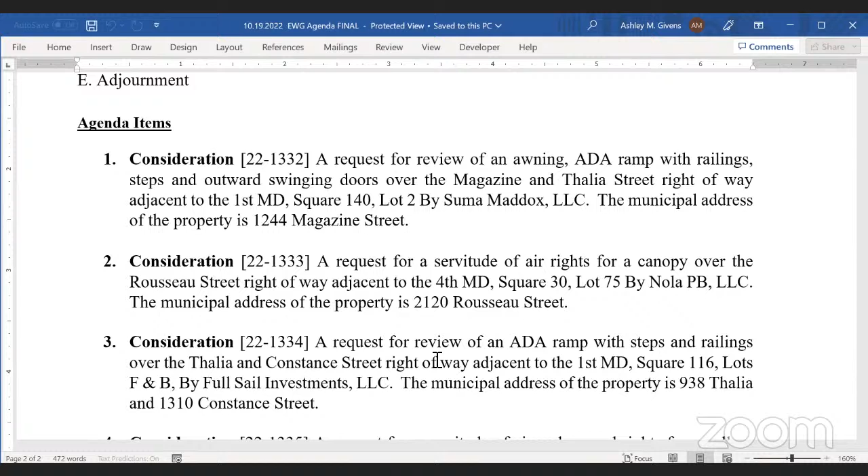If that's all, we can move on to the second consideration. So, one quick question for the first consideration, sorry. Louis, we would be in contact with you directly? Yeah, so after the meeting, I'll be emailing all of the applicants a copy of the minutes and who to contact going forward. So I will be emailing you Lewis of DPW, Tika of Parks and Parkways, contact information so you can work out the site plans moving forward. Okay. Thank you very much. You're welcome.

Okay, moving on to number 2. This is a request for a servitude of air rights for a canopy over the Rousseau Street right-of-way adjacent to the 4th Municipal District, Square 30, Lot 75. The municipal address of this property is 2120 Rousseau Street. And this one is fairly small, but here we are. I think Rebecca's here for this one. But if any departments have any comments, feel free. Yeah, and sorry, this is Becca. Our architects are also on the line if you have any more technical questions that I can't answer.

I'm sorry, this is Tika with Parks and Parkways. Just to clarify, you're doing a new construction and putting the access in the public right of way. Is that correct? No, this is Chip Burgess, Rome Architects. This is existing construction. It's 2 existing warehouses that we're renovating. There's a big roll-up door in the front that we're removing and we're putting in the storefront. And just so we have some protection at the entrance, we're gonna be cantilevering the canopy out 12 inches over the property line. There's no columns or anything. It's just a cantilever, just overhang.

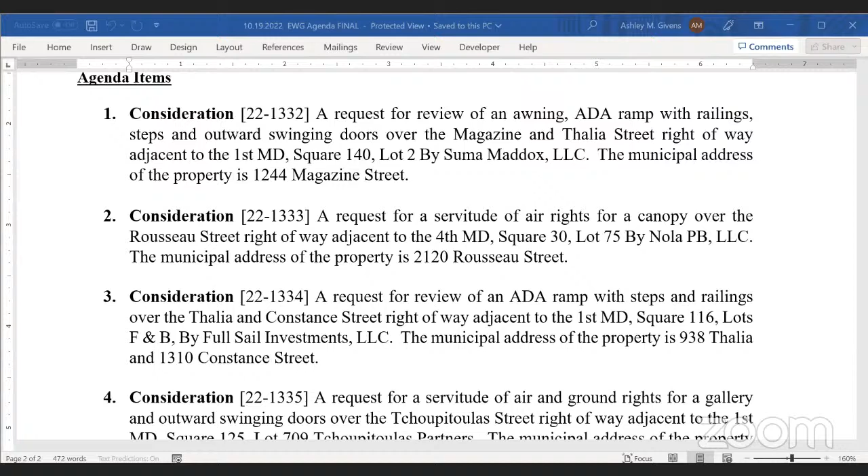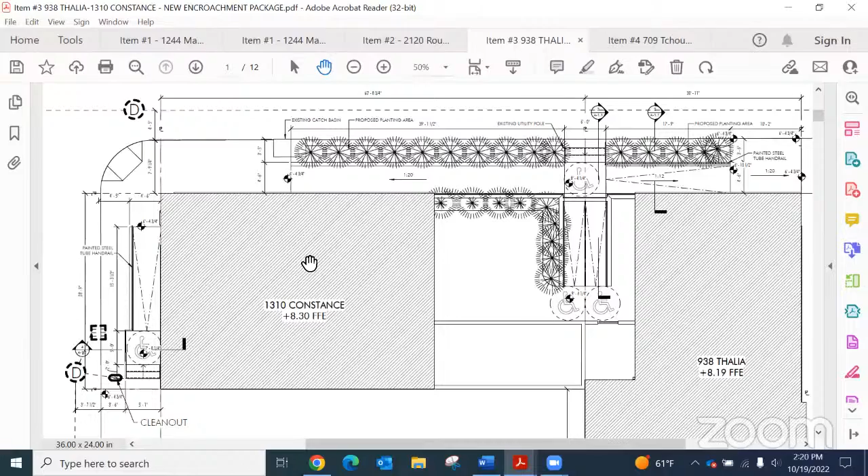Ashley, would you mind putting up the plans for this? Okay. Let's see. And my apologies to all because I got 2 and 3 confused. Okay, can you guys see them now? Yes, thank you. You're welcome. Okay, DPW, do you guys have any comments on these ramps and sloping sidewalks? Yeah, we don't appreciate them. Yeah.

It is new construction, right? It is. It's new construction, 2 separate properties, 2 separate lots. The ground floor of those would be retail white box space, and the upper floor is an apartment that is going to be an accessible, adaptable apartment. So the Thalia property is pretty limited, and they're standalone, each of them. So this Thalia property has a pretty limited street frontage and lot size, which we would like to avoid having a ramp there, but the Constance one has a bit longer, so we kept that one at 1 to 20.

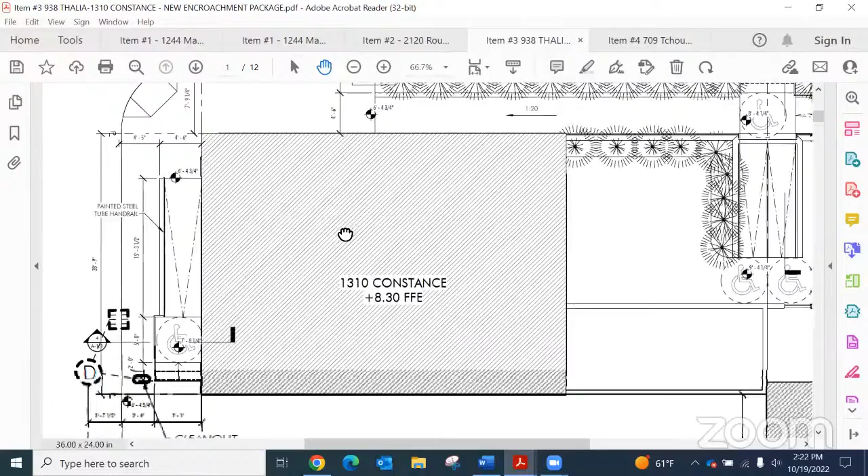And the stoop on the Constance Street side is the entrance to the residential apartment. Seems to be a pretty big yard there. Is there some kind of hardship preventing you from building a ramp in the yard? Well, those private lot areas would be part of the rentable square footage for the pretty small space available on the ground floor there. We also have permeability requirements to consider, and we're trying to do some stormwater retention with those elements.

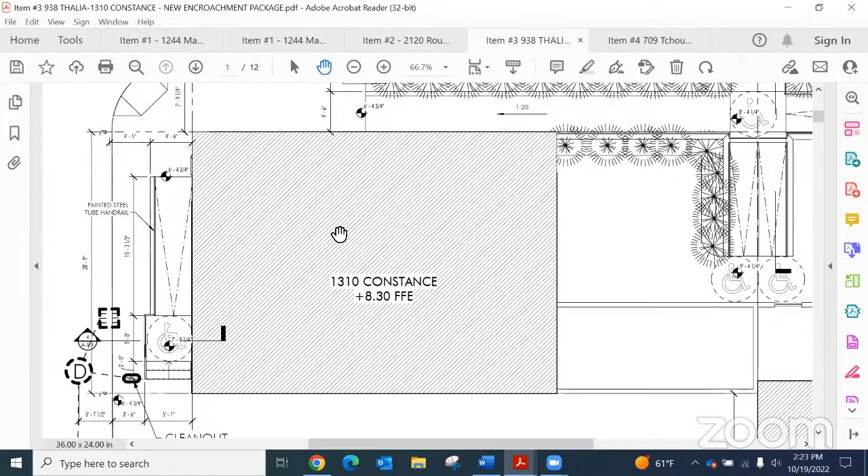You consider permeable handicap ramps? Just, we... So the thing is on Constance Street, you're just not providing adequate width for us. That sidewalk's too small for a ramp. We need to have 6 feet clear against curbs for this kind of element. So we'd have to object to the Constance Street concept.

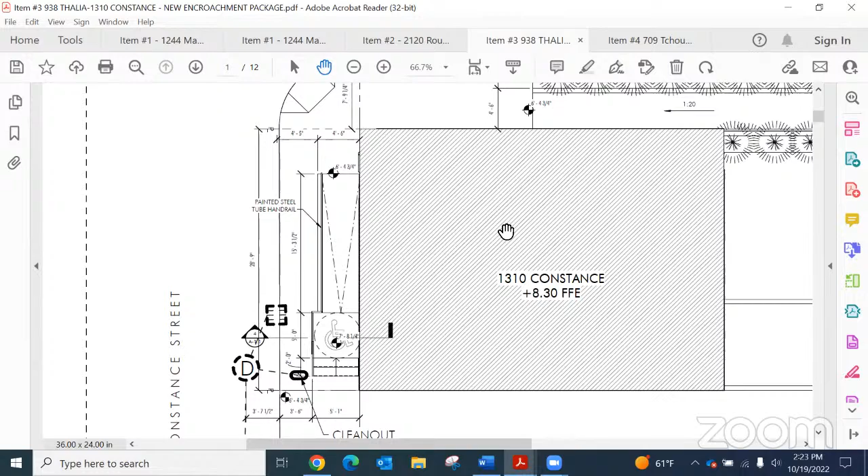As far as the Thalia one, this one's not technically correct. I'm not sure what your constraints are, but if you were to provide a 1 in 12 ramp, that lower area has to be 1 in 50 or 1 in 48, not 1 in 20. So I'm not sure why the ramp is shortened or why it is the way it is, but you got to be perfectly flat at the bottom of that particular ramp. I thought that was just for the cross slope. No, that's a rule with ramps.

I think they also can't be longer than 15 feet. So looks like you got a 17'9" ramp shown at 1 in 12, which is the exact maximum for a ramp. So you're not getting any tolerances there either. But basically, whenever you have a ramp, you have to have a flat landing at the top and bottom. And flat means 1 in 48, which is the same as the cross slope requirement, but you just have to have that slope in both directions at the top and bottom of ramps.

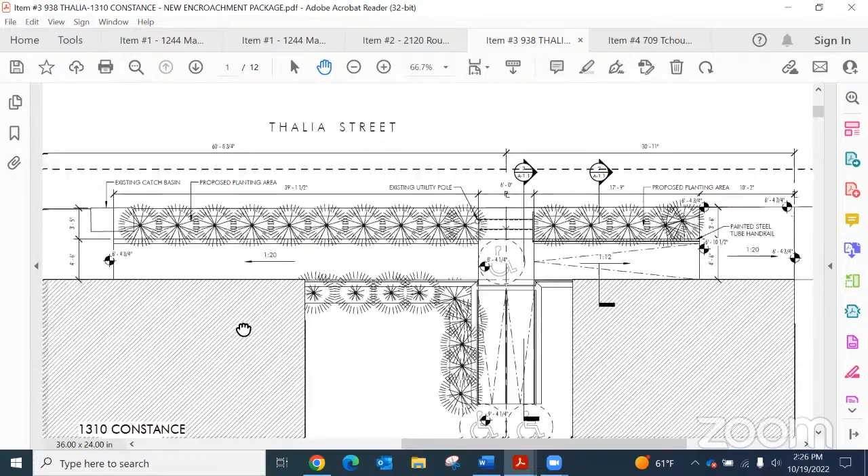I mean, you can't have a stoop that looks like this on Constance Street. There's just not enough space being left over. 3'6" to the curb isn't enough. Could you have a couple of steps? Maybe. But not something like 5 feet. If we could do away with the ramp and the turning restraints that come with the ramp and just had it be a stoop... I can't give you a 5 foot deep stoop. Understood. I'm saying we get rid of the ramp and the accessible portion of it. As I said, that's kind of a voluntary programmatic desire of the owner.

But if I can say split the difference, we got 8.5 feet there. You can give us a 4'3" sidewalk passage and stoop. So that's something that could work. I mean, I'd rather have a 6 foot passage, unless you can show some kind of technical need for that. Like I said, we want to have 6 foot clear from the curb.

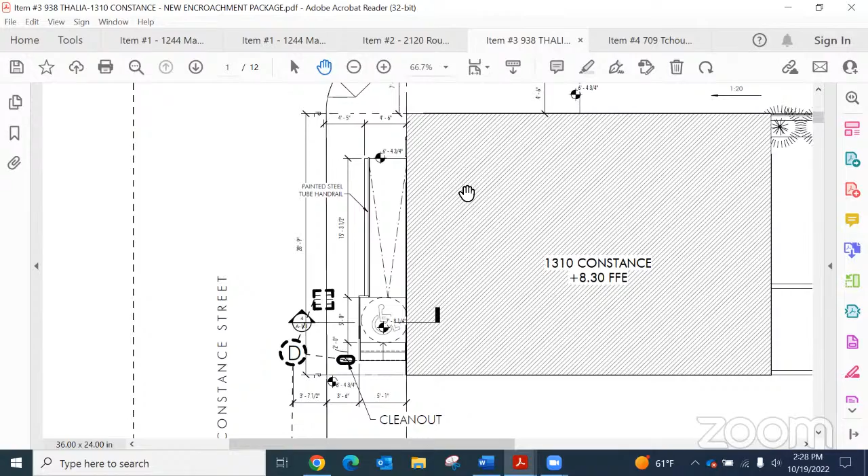And is this ramping on Thalia that's being proposed also voluntary? What's going on there? No, that's our accessible entrance into the commercial retail space on the ground floor. Okay. And that applies to Thalia and Constance. This is all new construction, on very small lots.

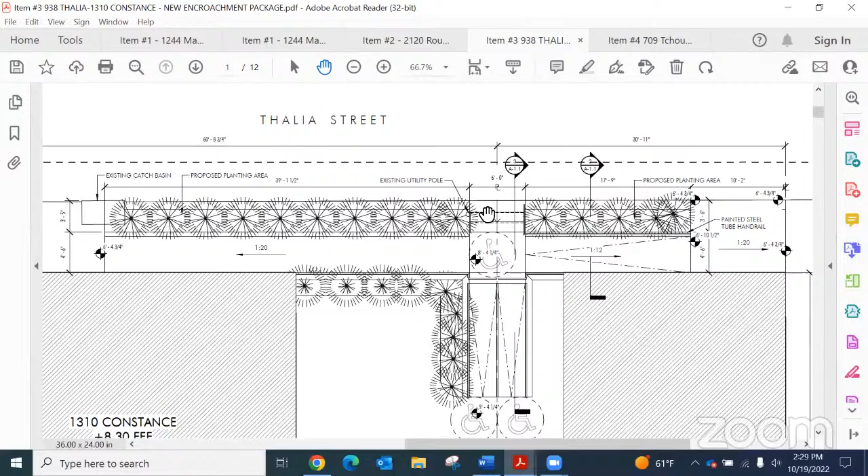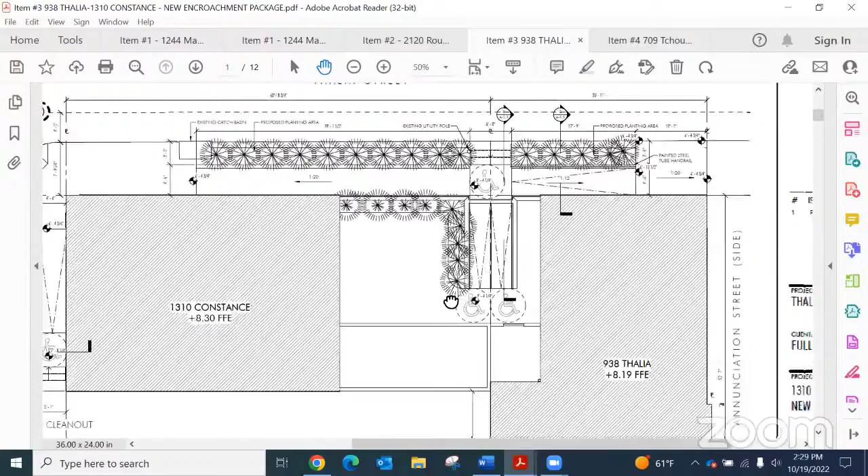I haven't looked inside, but just a first glimmer, if you could bring your handicap entrance in from the back, the same as from your commercial entrance. The design goal is to give the residents a separate entrance from the commercial space where we can. Okay, it was just a suggestion, and I'm looking at where that handicapped symbol is, and then is that a private yard or something for the apartment? Or is that part of this or no? It's the two handicap symbols in the middle of the sheet. Is that what you're referring to?

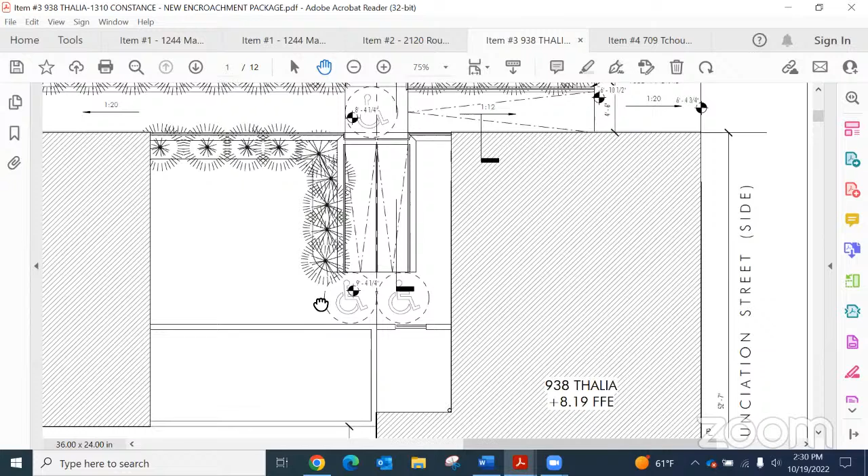Yeah, don't make it any bigger. Just go from... I wish I could move the screen, but anyway, it's just a thought. Where would you like me to move it, Tika? Can you scooch the thing up the other way? There you go. And see that little double lined area? I'm assuming that's a private courtyard. You could make it either be gated one way and gated the other, and then allow your handicapped accessibility from the back. Just throwing it out there. Yes, I see what you're saying.

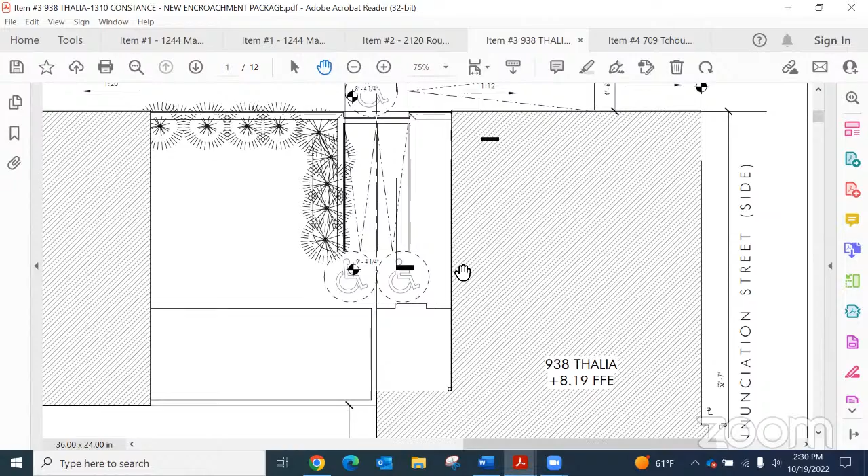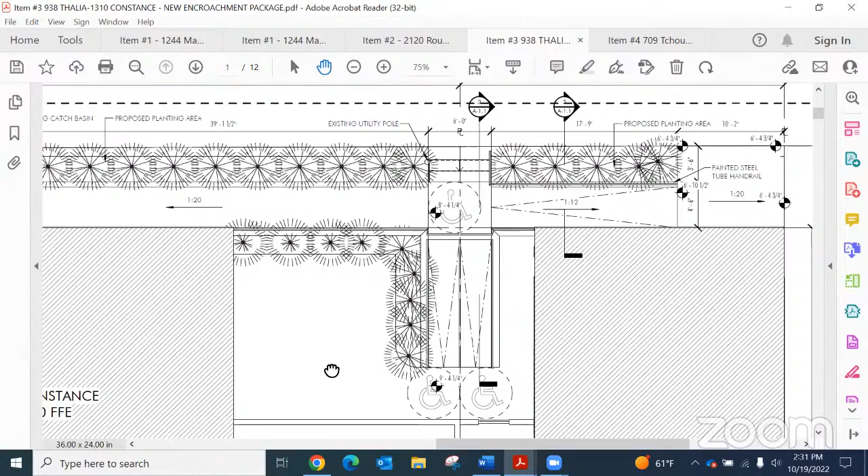Okay, Sewage and Water Board, do you guys have any comments? Ms. LaJoyce, do you have any comments? No comments. Okay, we can move on to the next one. I'll connect you with DPW as well on this one. Tika, you had anything on this, or you just asked questions?

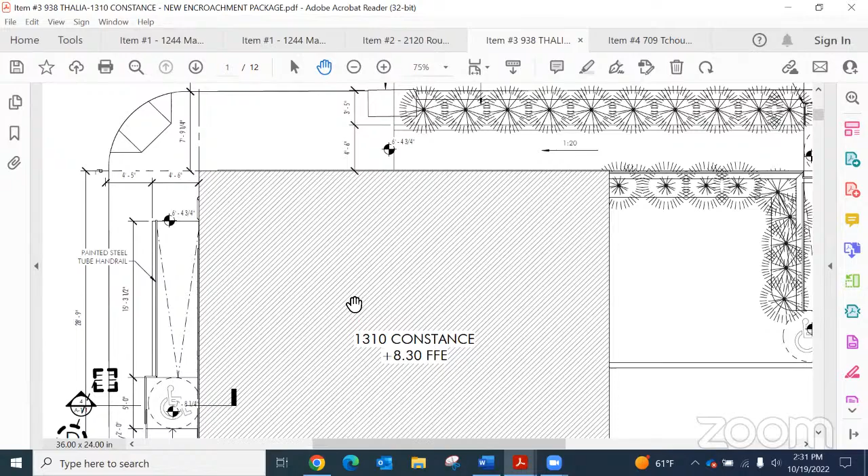Yeah, I don't know. Are you going for any BZA variances or anything? So I'll need to see a landscape plan. What? No, ma'am, this is all as of right. Okay. Any landscaping you do on the public right of way, I'd like to see the plans, because basically you're going to have steps coming up from the street, and then you're going to have, yeah, just let me look at it. Yeah, when we get to that point. Yeah, when you and Louis get to a point. Okay.

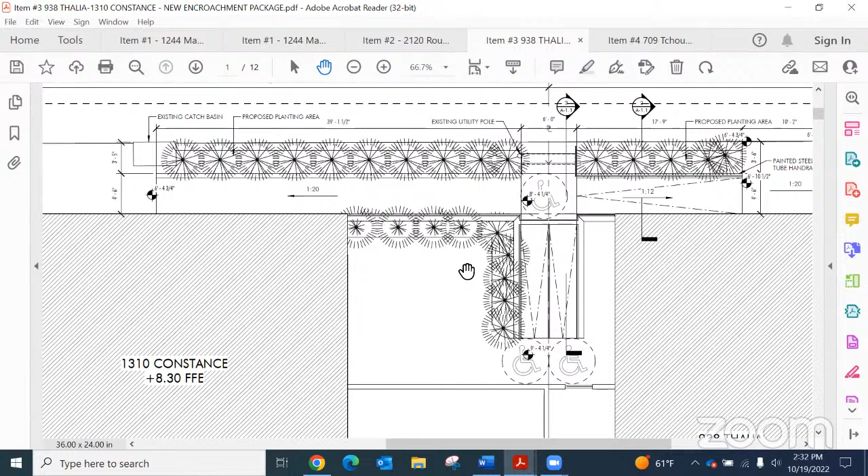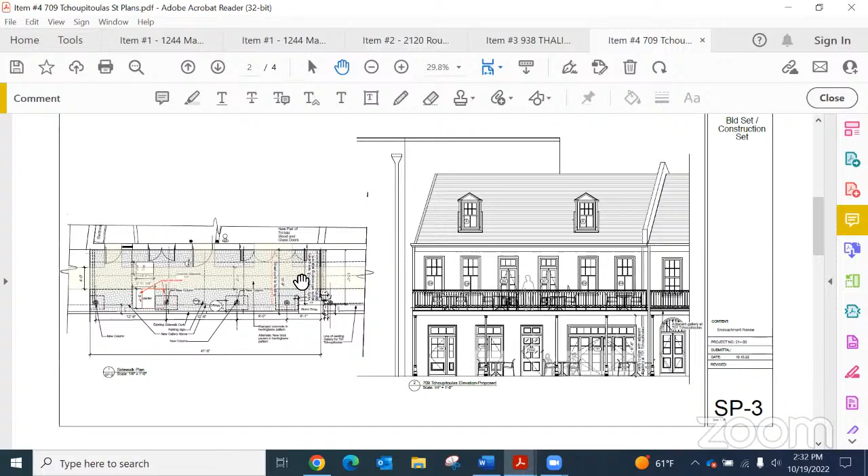All right, I believe we can move on to our last item on the agenda. This one is a request for a servitude of air and ground rights for a gallery and outward swinging doors over the Tchoupitoulas Street right of way, adjacent to the First Municipal District Square 125. And the municipal address of the property is 709 Tchoupitoulas Street. And I believe we also have the architect for this project on. All right. Maybe she's not here. Hello? Yes. Hi. I just figured out how to unmute. Okay, thank you. Yes, this is Sharon Bourne with Musso Architects.

Just a note, you have a 3 foot 7 by 7 foot planter, which is, according to Google, empty. So unless you wanted to relocate the planter, there'd be no reason to do that, but you'd need to fill it in. Okay, yeah. I mean, because it's for a tree. Right, there's no tree. Right now, it's just mud. Yeah. Somebody has helped it on its way, but I guess should we pave over it, or would that be acceptable? From my perspective, Louis governs the sidewalks. Okay, yeah, I mean, you could just incorporate it into the brick sidewalk.

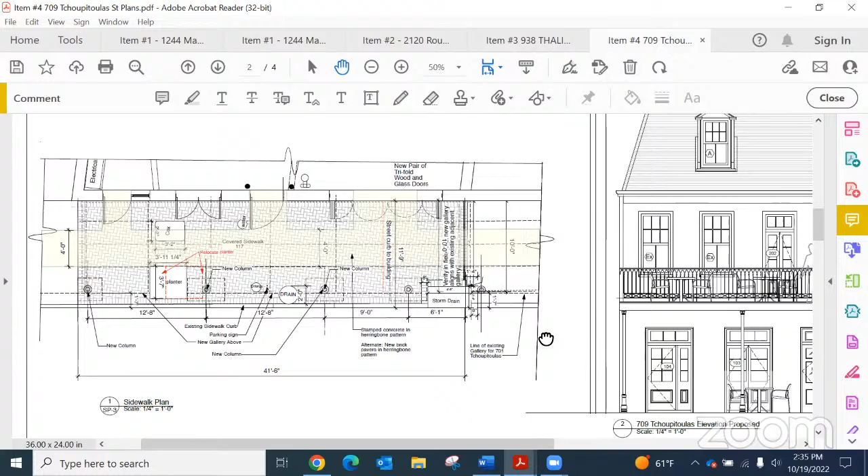I'm sorry, I'm assuming this is a historic balcony? I haven't done the verification with HDLC. We're still in the process. We just had some changes, and so we still need to get a review from the HDLC. They're still making changes to the door, but only as far as the look of it, not the use of it. That large opening. Okay. Louis, you have anything on this one? I do.

So in your sidewalk plan, this one SP3 detail, you're showing this 4-foot sidewalk path in the middle of the sidewalk, which is correct. It's good. The problem is that in your sidewalk sloping diagram, this one A41 gallery section, you have that sidewalk break. Sorry, your sidewalk isn't sloped based on your sidewalk plan. Now, maybe it's sloped the same way as the neighbors, but I think the neighbor doesn't even slope their sidewalk that way.

I think it might be a slight slope. I'm not sure. But basically, we'd like to see a flat sidewalk that aligns with that 4-foot sidewalk you're showing. Now in the CBD, you're supposed to have a 5-foot accessible sidewalk, a 5-foot area that's flat. So really on that sidewalk plan, we'd want to see a 5-foot clear section. But whatever you could do to have a flatter sidewalk would be great. I know that's kind of hard with these buildings, your doors are higher than the curb and that sort of thing. Right.